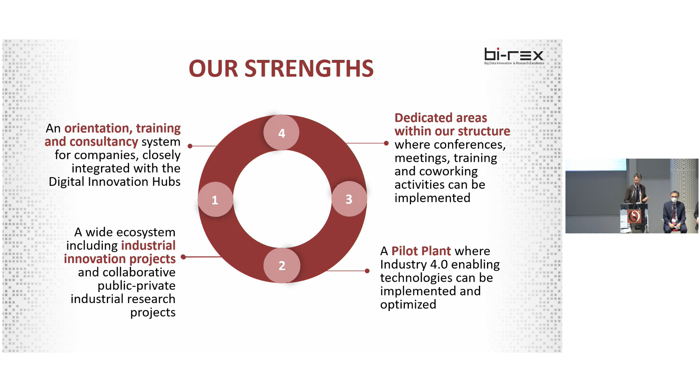I think this is the real core of the competence center. What is becoming crucial for companies, in particular small and medium enterprises, is to have the possibility to test technology before making investments. Our concept of pilot plant is a real smart factory where companies, professionals, and researchers work all together in a real production area.

We can produce over there, but without the limits of a production line. So you can make innovation, change parameters, you can play, let me say, with a production plant. This is a perfect test before investing in a production plant.

We also support the innovation projects we are co-financing there. And last but not least, this is also a crucial asset for all our training courses, to have a real hands-on area that combines, let me say, the academic and the company's training.

Just to give you a view, but again, my invitation to all of you in these 2 days is to visit us - our team will be happy to share the technology area. We also have laser technology, since here today, in these 2 days, we are going to be thinking about laser application and their impact on the manufacturing industry.

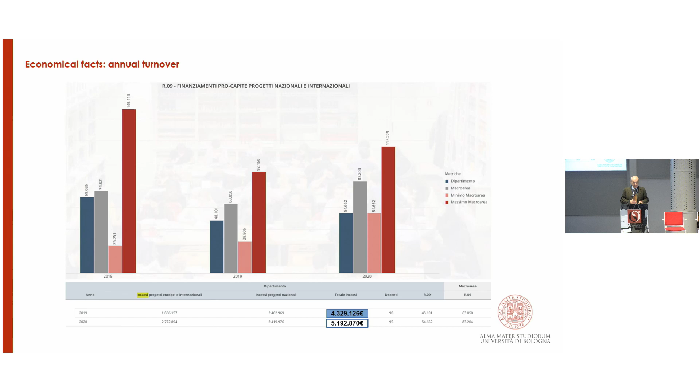Some economic facts: the activities sometimes mean also money used to increase activities and research. These are a couple of numbers regarding the work the department does with companies and competence centers. This is only the money, the return related to the relationship with companies, and a great part of this is used for equipment and positions for students after the bachelor's degree, in order to guide them on the path of research. Activities, didactical, yes.

The department is able to cover around 20,000 teaching hours per year, considering all locations, Bologna and Forlì, 4 laboratories in 2 different cities, and a great amount of other activities that make students aware of problems in the field. This includes competitions and learning by doing, meaning they're involved in collaboration with companies, internships, theses, and many other activities.

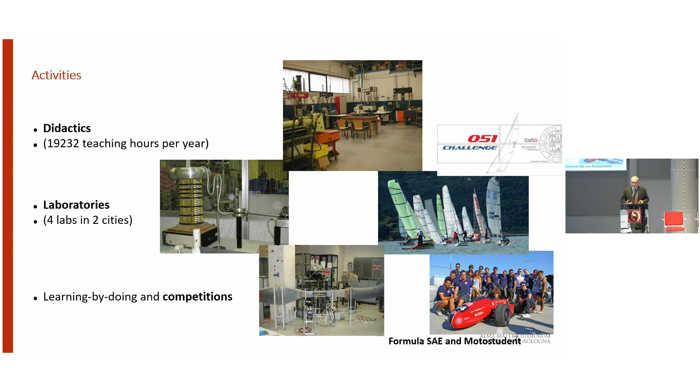This is what we are talking about. In particular, this course is dedicated to automotive in general, but in particular in Bologna it is focused on motorcycles.

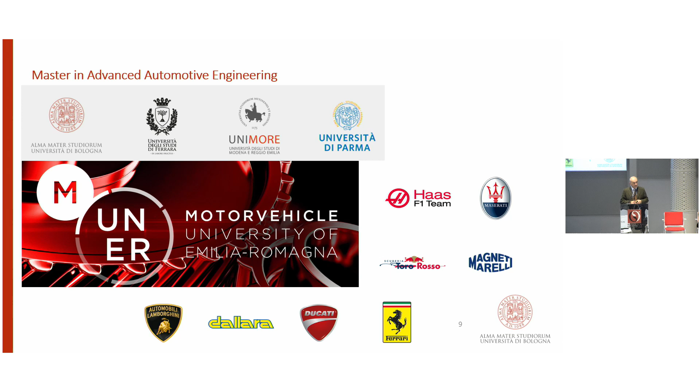Well, employment - I'm really very proud because we can see that our students start to work in a company very, very quickly after the bachelor, and they are very appreciated. I think that for our program, this means something really important and a great result.

What about research projects? At this moment, the department is holding around 500 projects at different levels, from European projects up to small local projects. This makes a great amount of activities, and most of this is dedicated to technology transfer to companies - this is one of the most important aspects. Our name is Department of Industrial Engineering.

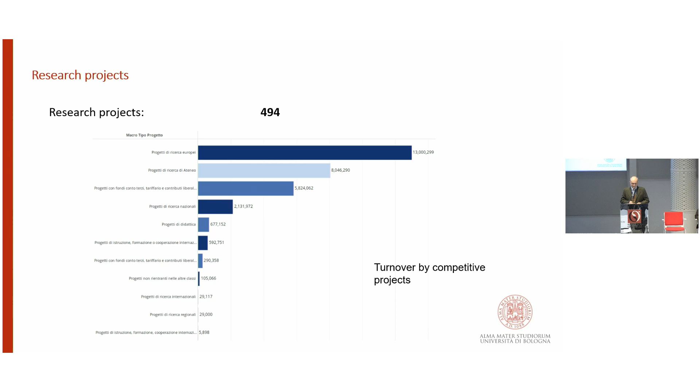Research fields are very different, various, and variable, from energy, management, machineries, manufacturing, of course, and engineering in general, design - this is all the capacity that the department is able to bring into the industrial field.

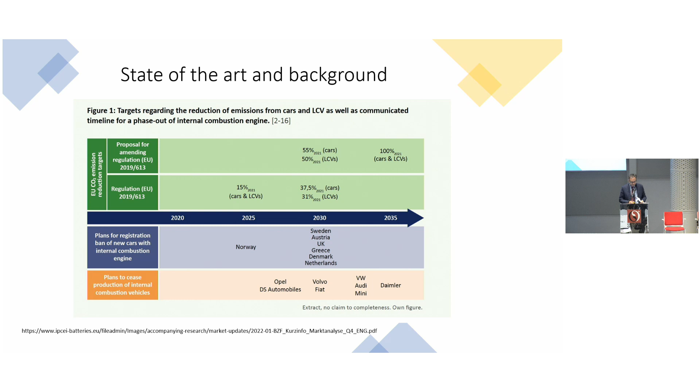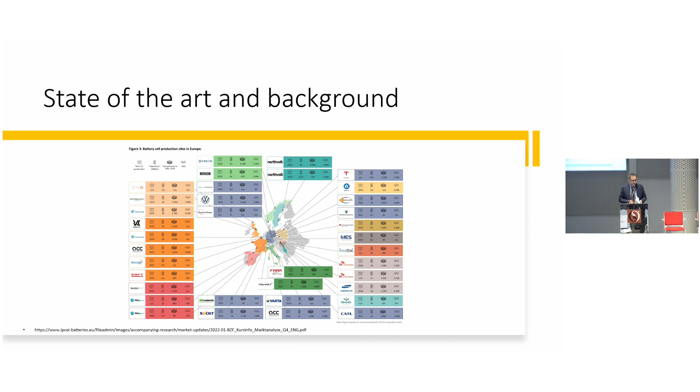As you probably know, there are several projects in Europe. Most of them are still projects, but all countries in Europe are organizing themselves for the production of this new electric power. This is a map of the gigafactories that will probably be built in the next future to satisfy the demand for electric power that we will need.

Why in Emilia-Romagna? Why did we start this seminar here? Because Emilia-Romagna is probably the only region in Italy where we have car manufacturers that are really transforming their production towards electric vehicles.

As you know, we have Lamborghini, Ferrari, Ducati, and Dallara, and probably I'm forgetting some other smaller companies. Here we are lucky because all these companies daily ask us for new information and new technologies, and this promotes the developing of knowledge, in particular the knowledge that we can develop in universities.

At the same time, we also have Muner, a consortium between all those automotive manufacturers. With this consortium and the university, as Professor Liverani said before, we have already created a master's degree program devoted to developing new knowledge in high performance motorcycles and cars.

The next question is probably: why lasers? We found a sentence that explains why laser is so important, because it is estimated that between 70 and 80% of all material processing in EV manufacturing can be done by laser. If you consider the increase we are having, you can imagine how important laser will be in the next future.

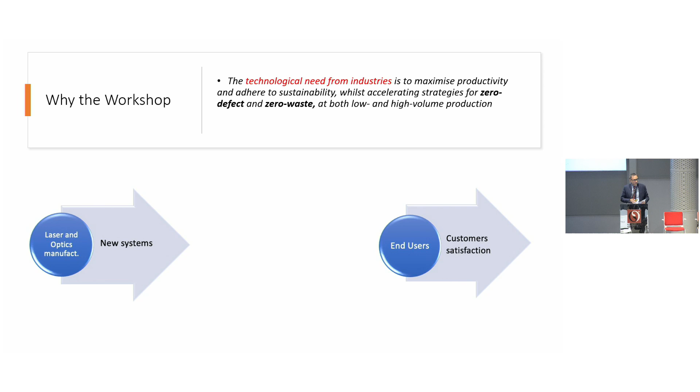So, in our opinion, why the workshop? Because we have laser and optics manufacturers that already have new solutions which can be used in companies, and end users at the same time are willing to use those new solutions for customer satisfaction.

In our opinion, we now have the necessity to create a link between this new hardware and end users. Universities and research centers can develop and optimize processes, and also facilitate the introduction of this new tool, because laser is sometimes seen as a new tool for companies. By teaching students through PhD programs, universities and research centers can help companies use these new tools, developed in recent years, in the right way.

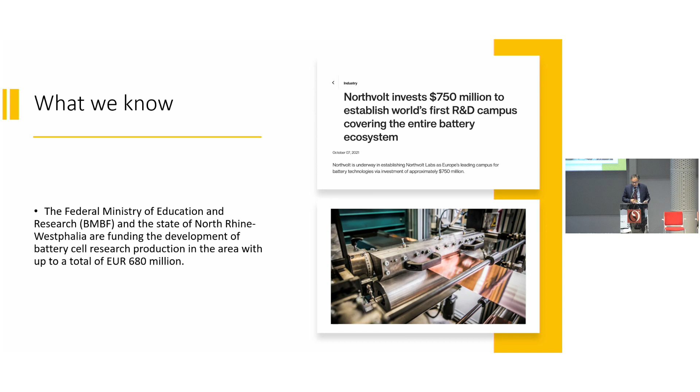So, what do we know from other countries? We know that all the European countries are doing a lot of investment in these sectors. This is information I easily found online about Northvolt - you can see how big this investment is in research activities. And this is also public information about what Germany is doing to promote and increase research activities and research development in these sectors. As you can see, the grant is huge, especially compared to Italy.

So we hope that in the near future, Italy and our regions can be on par with those European countries.

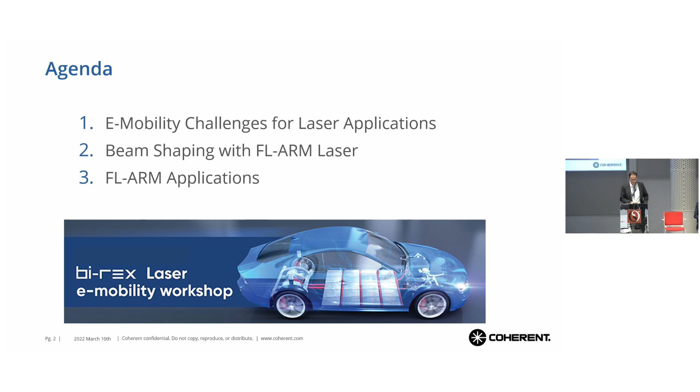So when we shift from the internal combustion engine powertrain to the e-mobility powertrain, or e-powertrain, we are losing a lot of components, but we are also gaining a lot of components. These components have a significant impact on the welding and joining methods we are seeing.

For instance, we are seeing parts coming into the e-powertrain that increase welding extremely - just think about battery modules, battery packs, or hairpin welding for stators. So there's suddenly a lot more welding that has to be done. Think about the welding length increasing in the e-powertrain - battery packs, battery trays, cooling plates - very long weld seams all of a sudden. And then think about the weld depth starting to change from extremely thin material to very thick material.

So here we also see quite a big variety coming for welding applications. Just think about battery cells with very fine, thin metals, versus inverters with deep copper welding. Here we see a much bigger variety all of a sudden for these joining methods to come.

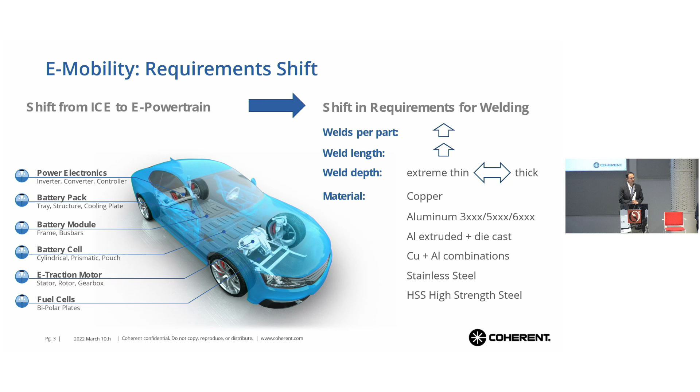And coming with these materials and these increases and modifications, there are a lot of other demands coming with these new components. For instance, all of a sudden we have to be gas tight, we have to pressurize these components after welding, and we have to have a very tight seam - we will not allow spatters on the parts. We have material combinations that are very challenging, not really meant for fast joining methods. We have components - think about battery cells - that are sensitive to heat, so you have to cope with these demands. So we have a variety of things that add to all these other demands we see.

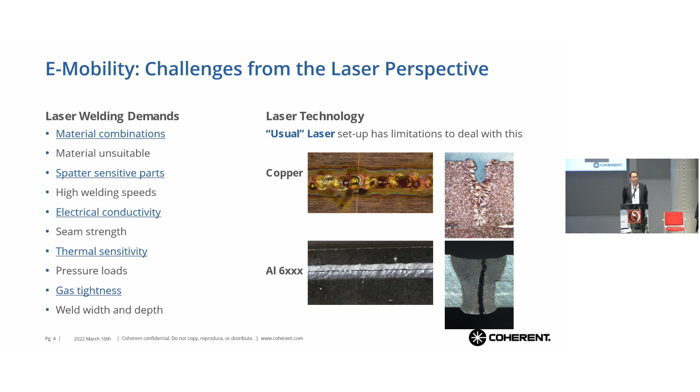So for the typical laser technology we are used to in the automotive business - typically welding all kinds of steel components and stuff like that - it's not really meant for coping with all these new technologies. So as you can see here on the slide, some of these things really cause trouble, and we have to do something to cope with these challenges.

There are some means we can use to meet these challenges. Of course, we can increase the laser power, which is a widely common thing we see. We increase the weld speed. We see a higher use of scanner optics and beam oscillation being used. There's a high variety of things you try in order to get better conditions, with different process strategies coming. We need to understand the welding process much better to really have a productive process, and we see various wavelengths coming to cope with these materials.

Today I want to talk about one of these measures, and that's the beam shaping with the ARM laser. The beam shaping here, we see a ring-core combination, and I will show a little bit what we can do with this ring-core combination to meet these challenges.

So, when we see the ring and the core working together, we all of a sudden have some effects when they are working together. These effects we can use for these challenging materials and challenging processes, and how this is working, I will give you a little bit of an overview.

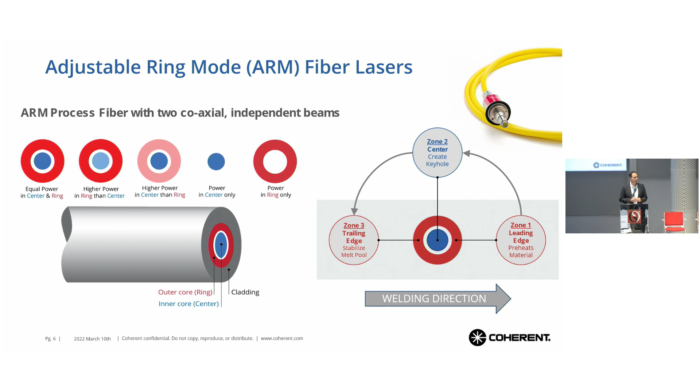First, for the principal understanding, the adjustable ring mode, or ARM laser, that we have in our laser technology comes with a coaxial fiber that delivers two beams, a ring beam and a center beam, coming through the same process fiber in principle. The special feature of the arm laser is that you can completely individually control the power of the core and the ring, or the center and the ring. The combination of the center and the ring is the theory we see here.

When we are welding onto the material with the spot, we see the leading edge, zone 1, shown here. Zone 1 is the leading edge that preheats the material when welding. The center forms the keyhole, zone number 2, which is typical keyhole welding. Zone number 3 keeps the keyhole open much longer and stabilizes the melt pool as it still heats up the welding seam.

So this is the theory to it, and what we can do with it I will show in the various applications.

Most important to understand is that we deliver a variety of different fibers with the arm laser. You can have this as a spliced version, a direct coupled version, and then different diameters. For instance, what's very new is what we call single mode arm. This is the first in the row with a single mode in the center, 25 micrometers, and 170 in the outer diameter of the ring. There's a huge variety.

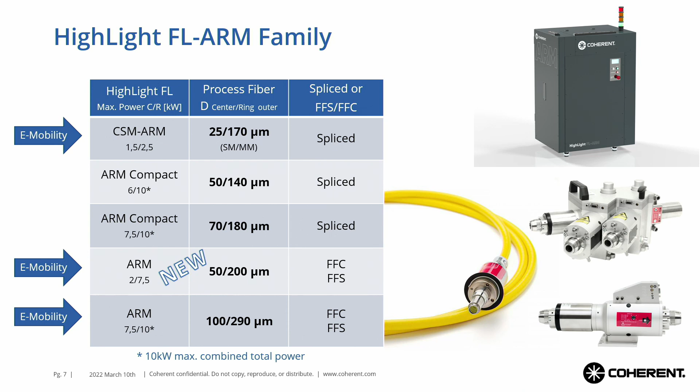We have a new variety, the 50/200, marked new, which we see now on the market with high demand in e-mobility applications. The advantage here is we have a very good combination with the 50/200, but we can combine this with a fiber-fiber coupler or a fiber-fiber switch, in comparison to the single mode arm which is a spliced version. Last but not least, the 100-290 is also seen very often in automotive and e-mobility applications, as this provides a bigger spot and also comes with a fiber coupler or fiber switch.

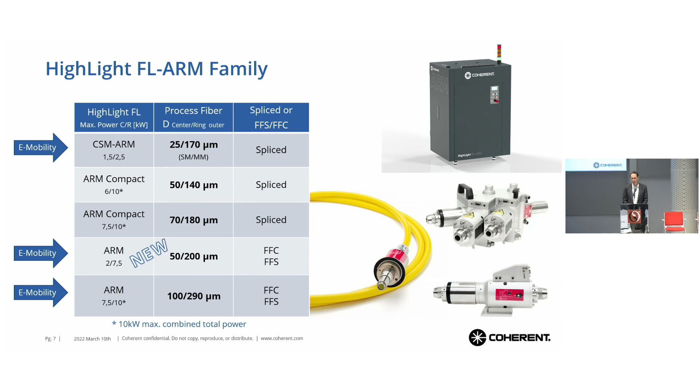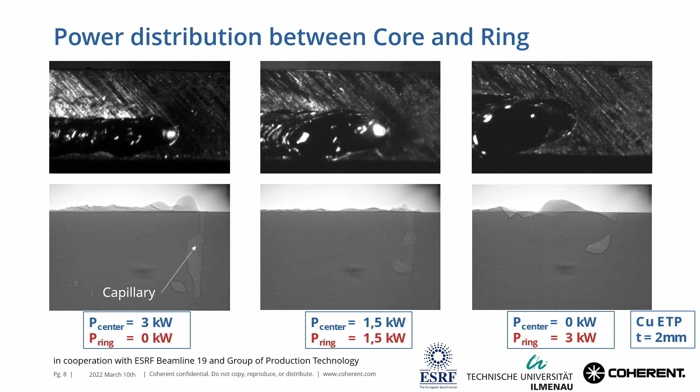This is something we have to figure out exactly for your application, and this is what we are doing in our apps labs to help you, together with our technology, bring together the right parameters to have the best results for you as a customer.

One of the features of the arm laser, which I mentioned earlier, is that we can completely independently control the core and the ring, or the center and the ring, from each other. This has some advantages, so we can use these effects in a certain way.

For instance, when welding copper, what we do is heat up the copper material, then ramp up the center. So when the copper material is heated up with the ring first, we increase the absorption for infrared laser, and then we can bring in the full power with the center and weld it.

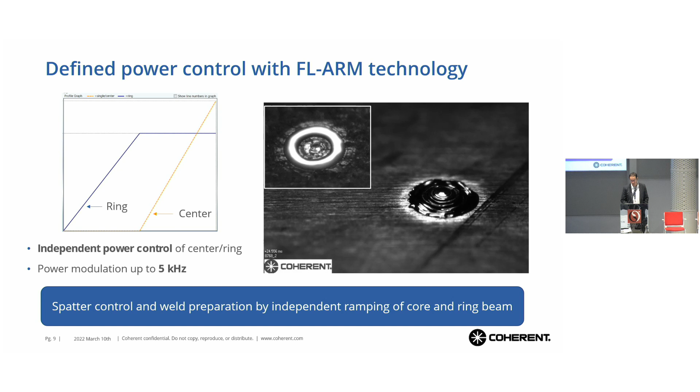Also, what we can do for the starting point of the weld seam - powering up the ring first and then powering the center - we can do the other way around when we stop the weld seam, and we avoid a pore or a crater at the end of the weld seam.

What's also a feature of the ring shape is that we can weld in all kinds of directions, unidirectional - it doesn't matter. The effect is always the same, even if we are doing different shapes or oscillating.

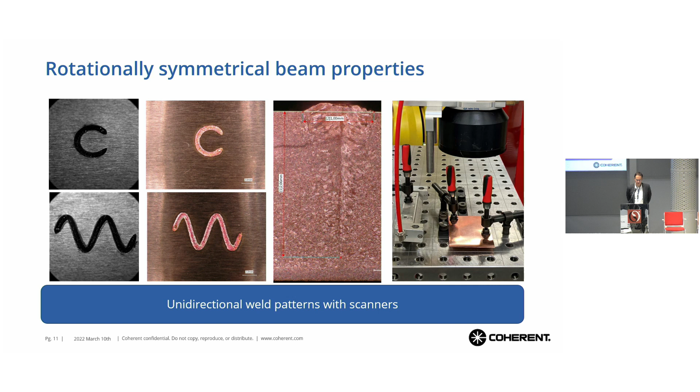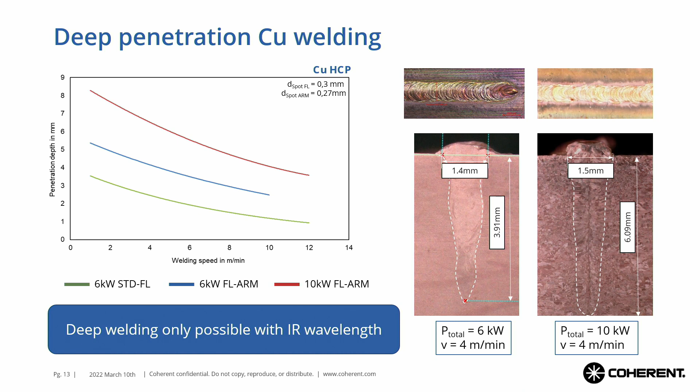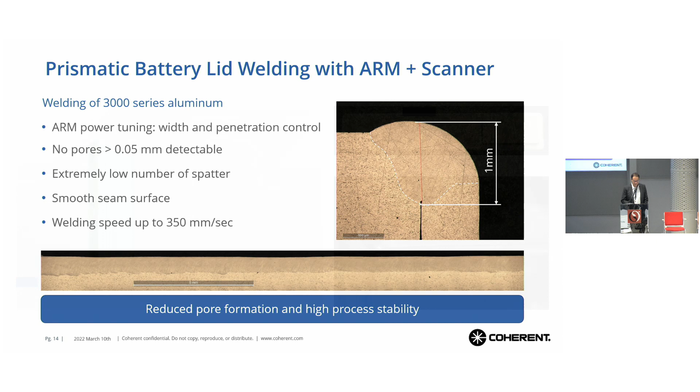Here we have some pictures. Sorry about that, start again.

Here we go. This is some of the welding that we do to the battery can. So you see a very controlled and very even welding that we have, even around the corners. So it's very important to have no spatters here and have a gas-tight welding.

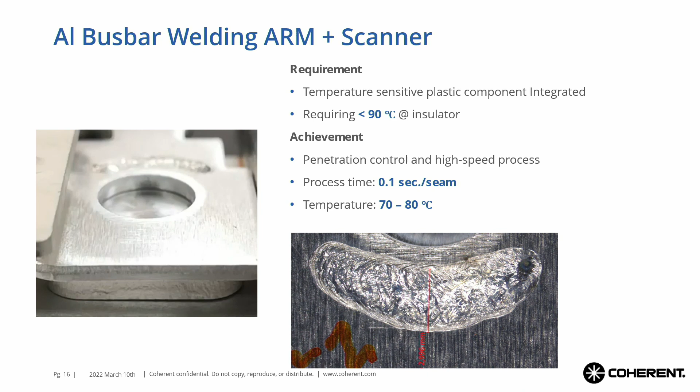Another example for aluminium welding is busbar welding for battery modules. The requirement is to weld very, very fast, because we don't want to harm the material inside and the isolators that we have there. So here the task was not to go over 90 degrees. With the fast welding, we reached about 70, 80 degrees in this example. You can see here the welding.

One more slide and then I stop.

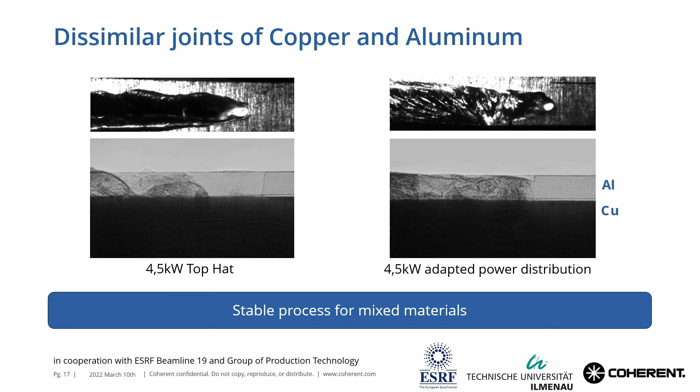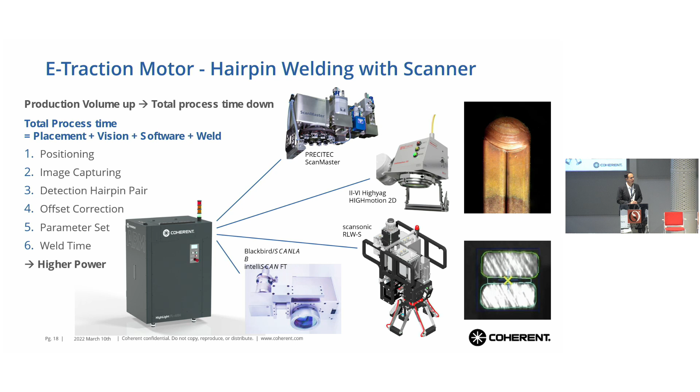Thank you, Thomas, very impressive. Thank you, impressive, congratulations for those results and for the presentation. Are there any questions? I cannot see questions from the... okay, please, Antonio.

Sorry, Antonio, just one minute. The microphone is coming.

It's very interesting, the concept to have a dual beam in the fiber. Did you take into account using other wavelengths, and even combining two wavelengths, one in the core and a different one, for example blue, in the cladding, the external cladding? Thank you. For the moment, we only have this near-infrared fiber laser. Other wavelengths are important, I understand this, but currently we don't offer them, and we are not experimenting with this hybrid version of different wavelengths in the core and the ring.

Thank you, Thomas. More questions? Time is over, we cannot have time for another question, sorry. But I'm sure I will come to visit your stand. Congratulations.

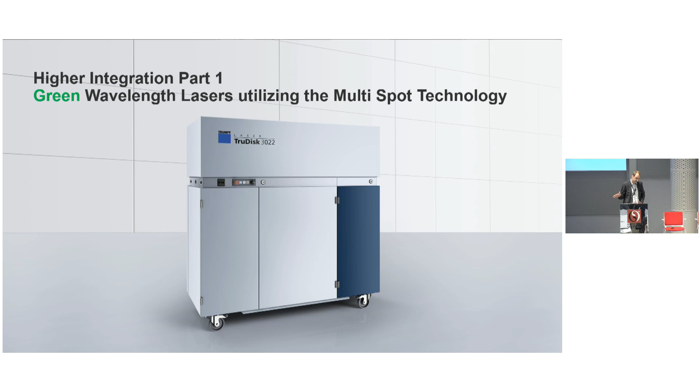Through the green lasers, the visible wavelengths, we have found that they work especially well with copper, increasing absorptivity. But once you leave the heat conduction weld mode, we have seen some gaps in between regarding performance and quality of the weld seams we're generating.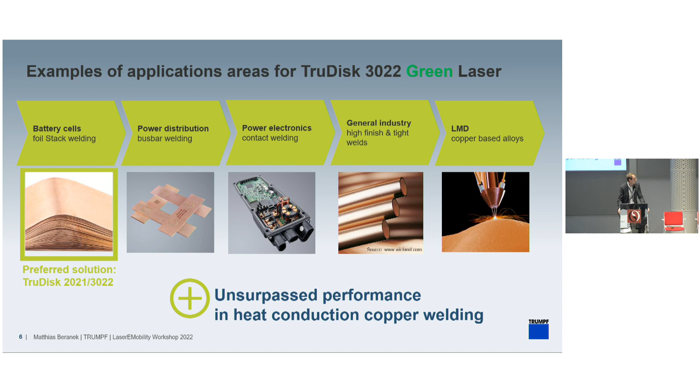Higher integration also means we will use the latest waveguides we have, talking about brightline weld, and scale it up even further. This is an application we get increasingly requested, where it's all about tightness, helium tightness in many cases. This is true for everything which houses power electronics, like inverters, loading sockets, and so on.

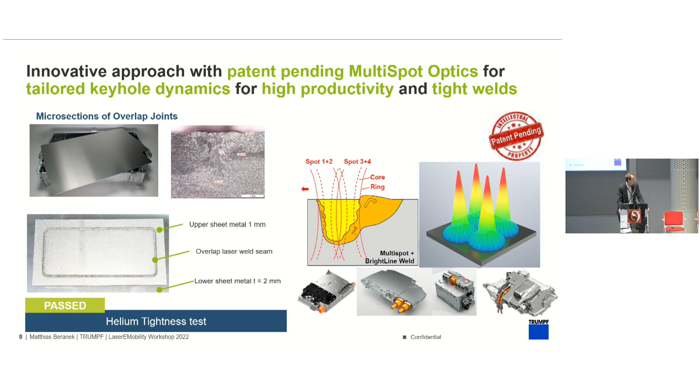What we did here is add a DOE, a diffractive optical element, to the brightline weld system. On the right side you can see the result: we would be using 4 spots instead of 1, which especially increases the width of the weld seams, greatly contributing to getting the tightness needed for high specifications. If we look at some high-speed videos of the process, I think the difference is directly visible.

On the left side, we've got the standard BrightLine Weld layout with a relative size of the melt pool. On the right side, you can see the effect of that multi-spot waveguide: you get a wider seam, or a wider melt pool in this case, which then leads to that tightness.

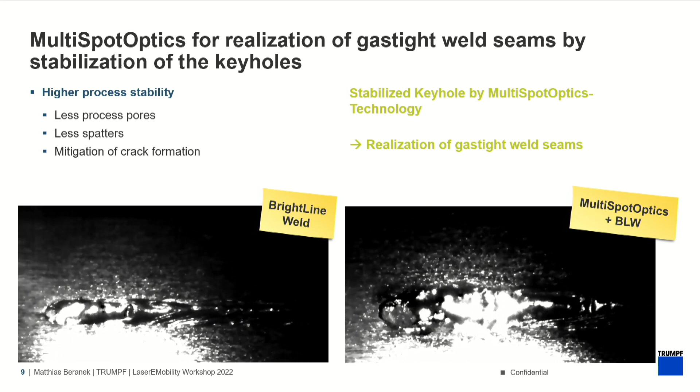A side effect of that is that we've seen also improvements for the welding of cast aluminum. I think many of you know this is not easy, even with the laser. With this multi-spot optics, as you can see, we have created seams with a high degree of cleanliness in terms of porosity formation, so very low porosity.

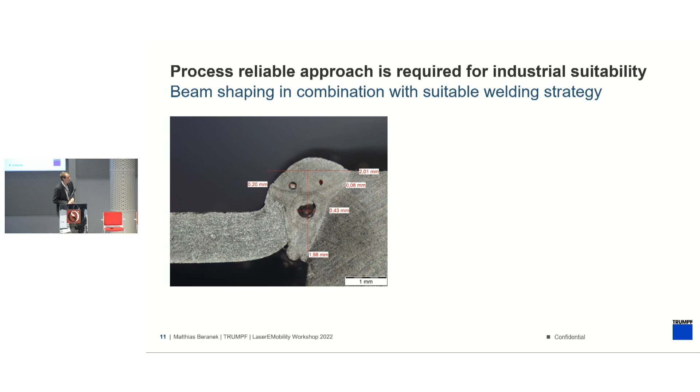The approach here is to have a multi-pass weld as well, not a single pass weld—it's repeated, which allows even improved outgassing of the pores. In the old world, the pores were practically laughing at you in some cases. With the multi-spot optics, we can see a great reduction of porosities, which is the main problem in cast aluminum welding. So it's quite a great result.

Then there will be improvements and even higher integration in the can cap welding. This is for prismatic cells, what's used today, let's say, welding with a relatively low speed.

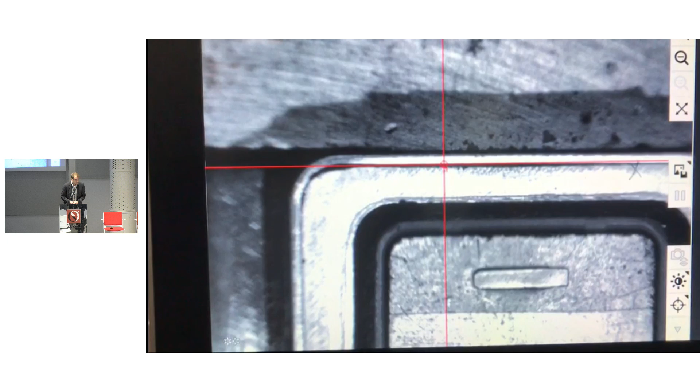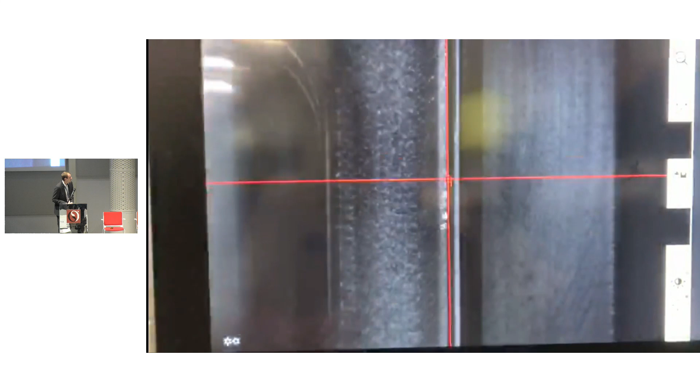And what we will do now is combine the sensor technology in order to exactly determine the weld joint. You can see that it's just a dry run without the laser on, which is quite essential in order to get to what you can see in the final video.

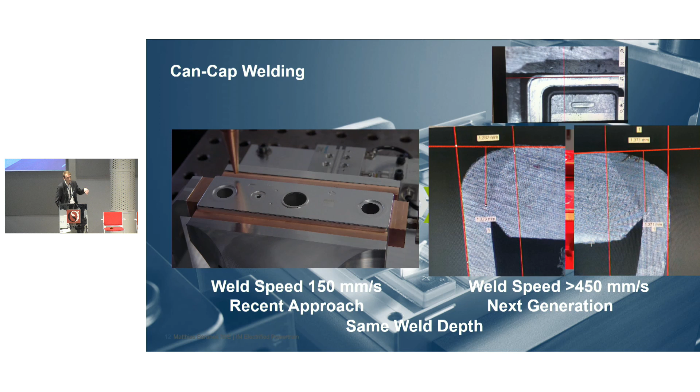Using again a bright line single spot process, but then be capable of getting much faster, so that's 3 times at least the productivity we have today. This is what's possible with the combination of weld joint detection and scanner welding. So that's the cross sections - welding depth here was 1.3 millimeter, and the uniformity of the weld seams all around the can is actually quite high.

And then I go to the higher integration part 3. This is the hairpin welding, which has certainly grown quite mature. The main application here is, of course, the contacting, the welding of the pins, regular pins, as well as the phase connectors of the E-drive.

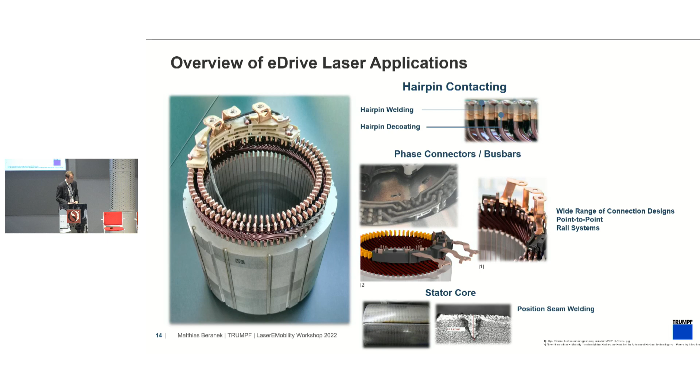We're doing this for 5 to 6 years now, practically every day. There's an installed base of more than 350 high-power lasers from Trumpf for both the welding and the ablation, which is the preparation process happening before the contacting. And for that, it has been a great time.

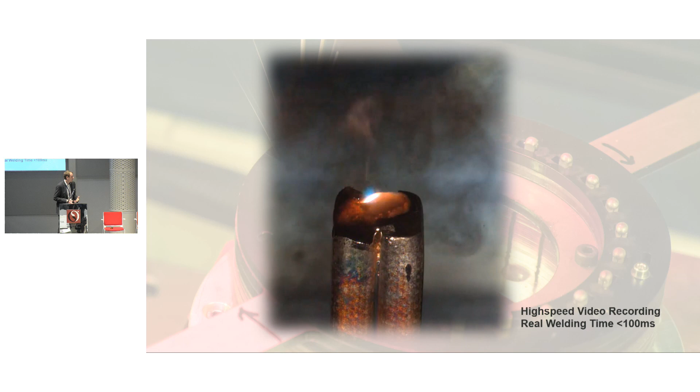What you can see here, just in case you haven't ever seen a hairpin weld, that's a high-speed video of how it's carried out. So usually you will use the scanner, which creates a certain shape, a wobbling movement on top of the pins, which then will create the melt pool. It's important to understand for everything I will say afterwards. By the way, welding times at the moment are around 100 milliseconds for the typical cross sections.

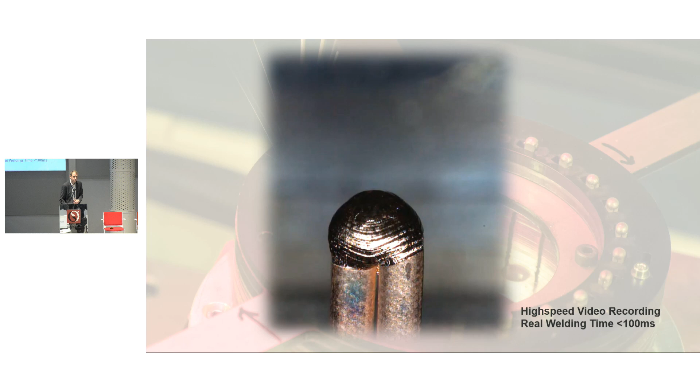So this uses high power infrared lasers, most of the cases with the BrightLine system. The reason for that being 2 things in the first place, one of which is spatter formation, which is more relating to the manufacturing side of things, talking about keeping the machines clean, and also do no damage to the windings of the motors.

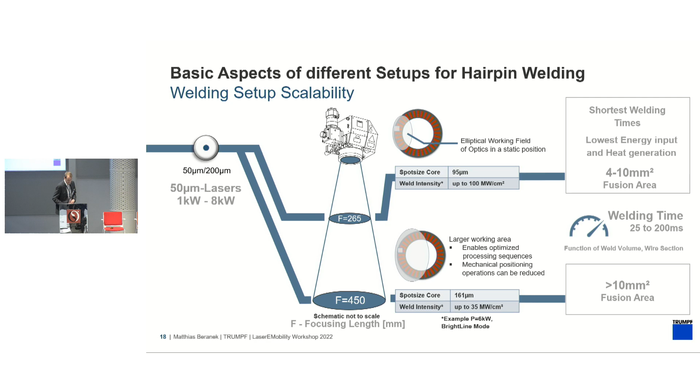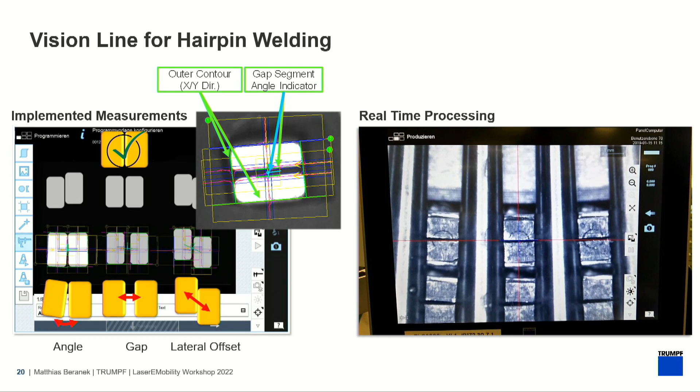So born with the hairpin application was that you will use a distinctive process in combination with a sensor technology. In that case, we have to cover dislocations of the pins which still occur in a fixture, even proper fixtures, and try to level it out or have cancellation strategies, easiest case. So we will measure the outer contours of each and any pin, even before the weld is starting, in order to deal with the problems which might occur.

In the production solution, we will of course not measure pin by pin, but go to group measurement strategies, this is how we call it, in order to bring down the measuring times as they will add up to the welding times.

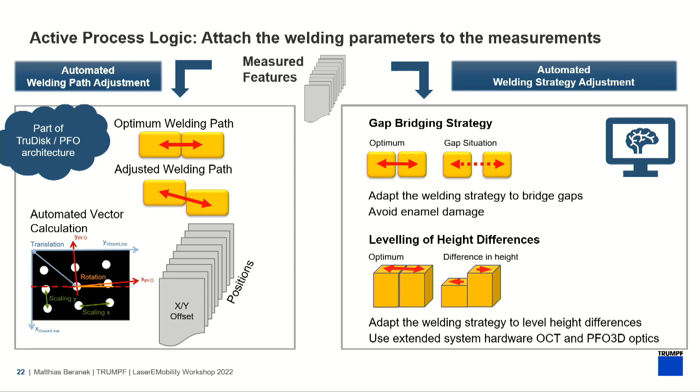So it contributes to increasing the robustness of the welding process itself. Another thing is that the sensor systems, of course, have their weaknesses. This is something which today happens in the ppm range of failures.

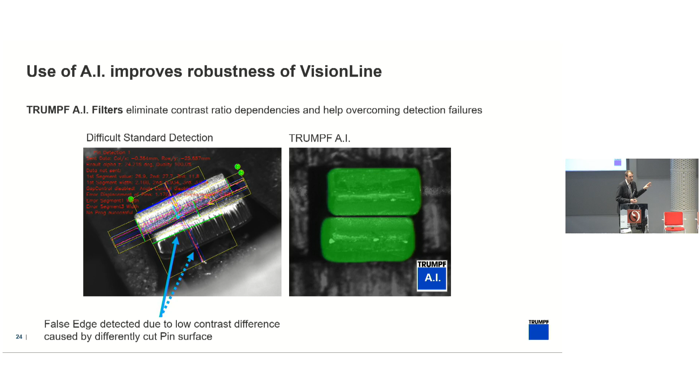Imagining the mass of welds we have to do, especially looking at larger volumes of e-drives, there will be false measurements, because this is picture acquisition—grayscale evaluation of the pictures. On the left side it shows what could happen in some deviation cases, a false measurement. What we are transitioning to is replacing that grayscale evaluation with artificial intelligence, pattern recognition, which is meant to bring that ppm range of failures down to zero.

It just works great. It gets you independent of contrast conditions on the parts and whatnot. So this is the next step in technology, which will be just great.

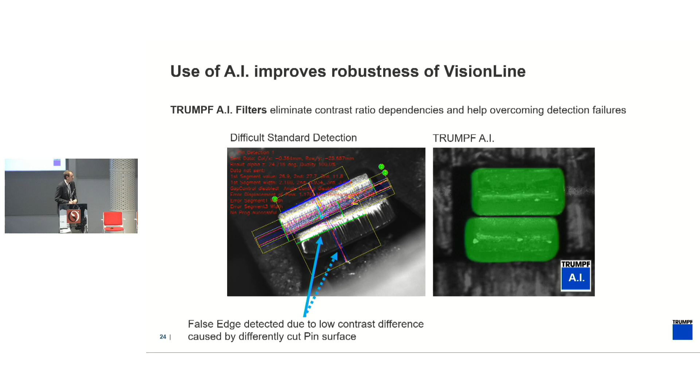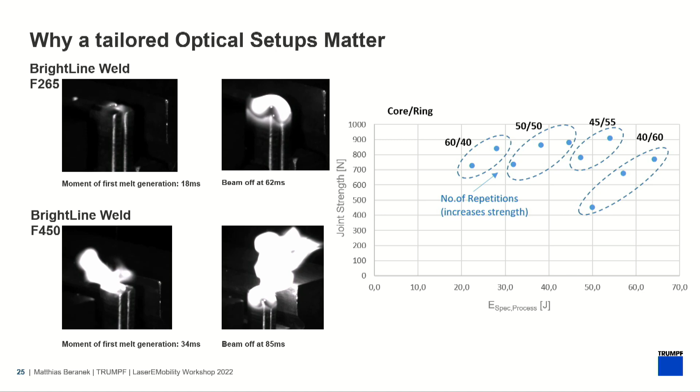I'm almost done. At the moment there's a discrepancy between what we want for a perfect welding process—like using a very small spot—and what the machine concept might want, a large working field. To bring that together, we've created the possibility to unite the two into a multi-optic concept, which will in addition reduce the cycle time quite a lot.

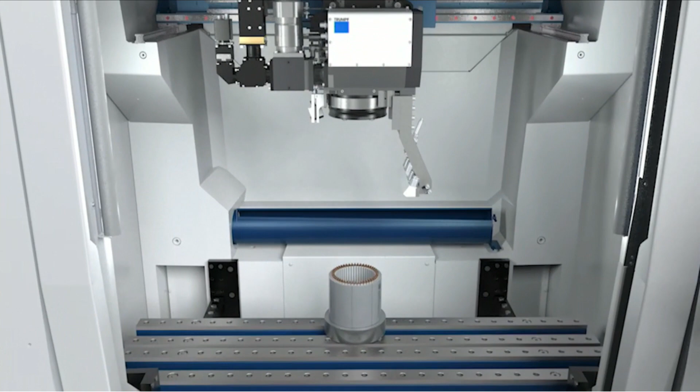So if you look at the video, this is how it's working today. The measurement is done up front, like I told you, and then the welding is carried out, shown here in red. And we even have to split it two times in the stator. So this is how it's working today.

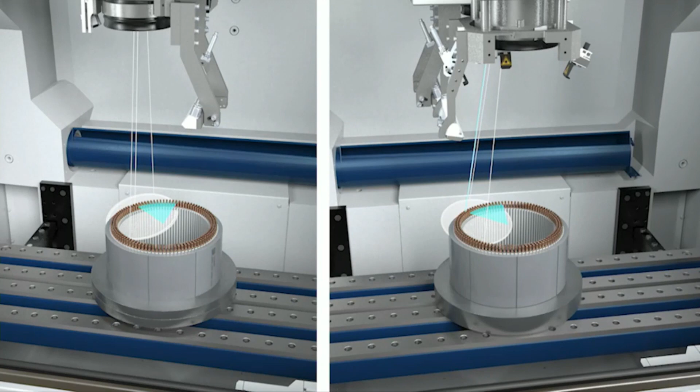If we now go to the dual PFO concept, we'll be capable of using the measurement values of one optic for the other one. This means a deeper and higher integration of the system, and we can cut down the overall cycle time quite a bit. It's especially impressive and interesting for large stators, which are quite standard.

If you pay attention on the left side, there's always some mechanical movement in order to get the next hairpins into the working field. On the right side you'll see more or less just one mechanical movement, and then the rest is done by the optics and measurement algorithms. Now we're finished on the right side with the dual optics, while the other one is still working.

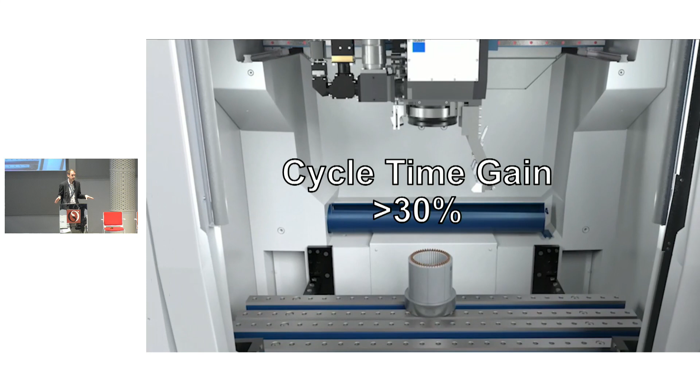The gain here, in that case, was around 30%, which is massive, given the fact that until today we were always working on optimizing the welding times themselves. Now this is just something which is coming out of the system, already giving a very high benefit in that case.

So I want to leave you with that. I'm even two minutes early, so there can be a lot of questions. Thank you very much.

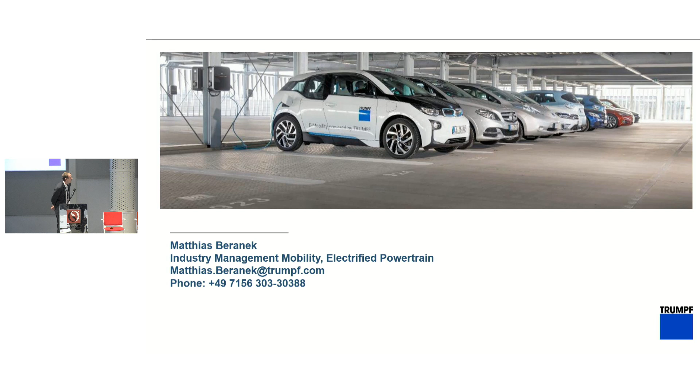So, for being on time, thank you very much, and congratulations on these new research results, very impressive. Are there any questions from the audience? I cannot see questions from the people connected on the internet, so please, Gökhan.

Thank you very much, Matthias. It's actually good to see you after 2 years, right? So, yeah.

Congratulations on everything we've seen so far. You showed the importance of integration, not only the laser, but I have a laser question, being a laser guy. You showed a nice graph with green lasers, and it's nice to see commercial green lasers, near infrared, green, 3 kilowatts, BrightLine, single. But the green laser is essentially an infrared laser that is converted. So the question is, if we increase the power of the infrared laser, do you have comparable results from that point of view? A high power infrared laser against a high power green laser, how do they compare?

I think they are quite hard to compare in the first place. You have to have the use case in very demanding applications for infrared at all. And it's quite right that if you had the 3 kilowatt green, this would mean an original 6 kilowatt infrared. If I compare that, we usually have totally different applications where there is not a 6 kilowatt green laser at the moment to compare to a 6 kilowatt infrared. So it's a little bit tricky, but I would say the use cases differentiate really where there is a very high welding depth, for example.

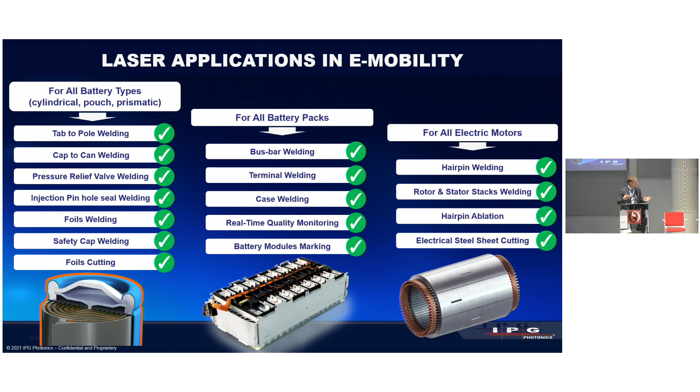So when we receive a request from the customer, we start understanding how to approach the problem. The customer comes with a problem, but the laser is not a universal tool. There is not only one laser for doing everything. So we start understanding what is the best laser for that specific application, for that specific problem.

So the lasers differ in terms of wavelength, for example, and we have seen in the previous presentation that wavelength is not only infrared, other wavelengths are interesting for these applications. But also lasers have different characteristics in the time domain.

So we can go from CW, where simply you switch on the laser, fire the power, switch off, and the laser stops. Or you can move to QCW lasers with millisecond pulses, with high peak power and low average power, or down to nanoseconds, few nanoseconds, picoseconds, or femtoseconds, and the results of your laser-material interaction are completely different.

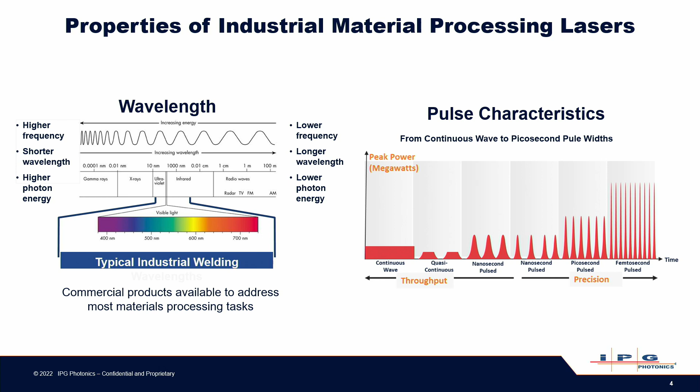So this becomes even more important if we work with high reflective materials, difficult materials like copper or aluminum, which are the most popular in the e-mobility world.

If we consider copper, for example, we start understanding whether it's better to work with visible radiation or infrared radiation, because the two solutions are different and give different results. If we consider the initial absorption from the material, it seems visible is better because the absorption is definitely higher in the visible range than in the infrared.

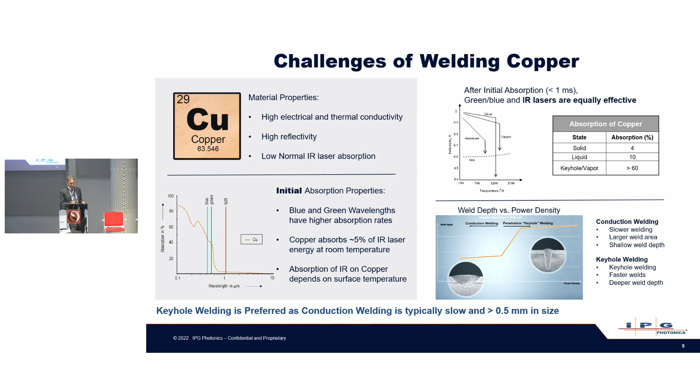But if we consider what's happening on the material as soon as we start the laser, the situation changes immediately. In less than 1 millisecond, the absorption changes dramatically. As soon as you move from room temperature to heated up material, or to melted material, or after the creation of the keyhole, the absorption increases dramatically with significant benefits. So again, we have to decide what is the best laser for the application.

IPG is producing a lot of lasers. Everyone knows IPG. IPG is the world leader in fiber lasers, the first to introduce fiber lasers into the industrial market. And we currently have, I think, the best laser product portfolio, with lasers scaling up to 120 kilowatt CW. Actually, we also got an order for 125 kilowatt CW, but down to short pulses, picoseconds, femtoseconds, UV to mid-infrared, so a lot of opportunities.

But laser alone is not enough, so we introduced different possibilities for different optics, so you can get very small spots, single small spots, or multi-mode or different beams. We also introduced optics, heads for the process, scanning heads, wobble heads, because the laser alone is not enough. But at the end, what is important for the end customer is not how the laser works or how it welds its parts - what's important is how well the parts are welded. So we introduced the monitoring option too, because at the end it's important to have reliable production, stable production, high quality production.

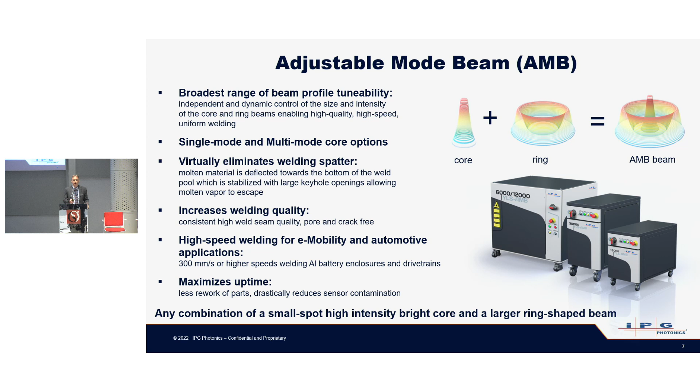Real single mode means 10, 15 micron fiber, and we can have, in principle, any power. We are delivering single mode lasers up to 10 kilowatt, but in this case 2 kilowatt is the perfect dimension. In the ring, we can have almost any power, but also any fiber dimension, because IPG is very vertically integrated - we design and produce our own fibers, which allows us to design the solution that we think is better for the customer's needs.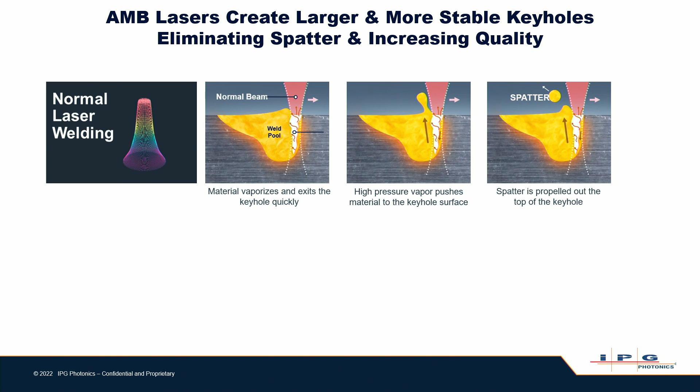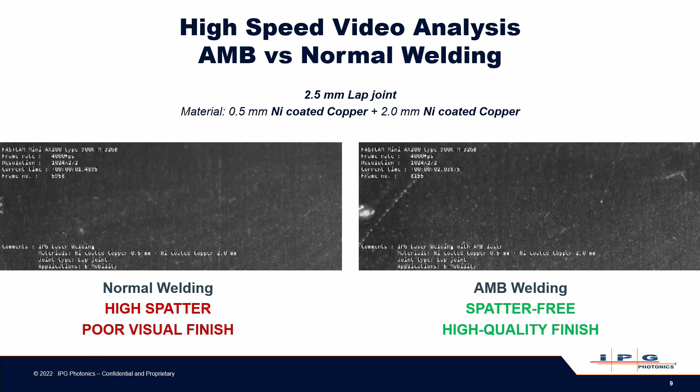And the benefits of the AMB we have already seen - better quality, better stability of the process. We also tried to give an idea why the AMB brings better results, mainly spatter-free and better quality. This has been well explained already, so I can save some time for my presentation. At the end, the ring added to the beam allows better stability of the keyhole, better dynamics of the gas pressure inside the keyhole and of the weld pool, generating a very stable result. You see here the comparison in the same application with the standard beam and with the AMB.

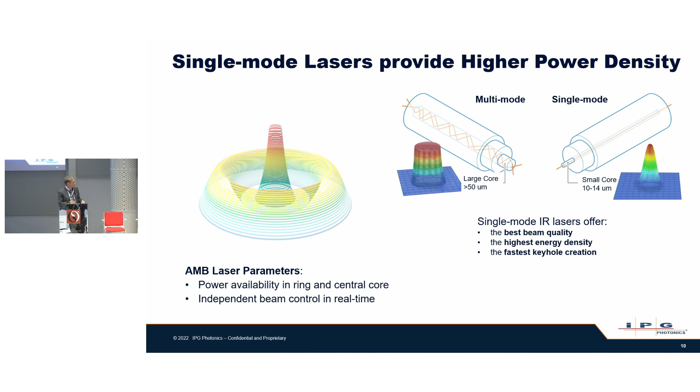So as said, we have two completely independent lasers, with a single mode in the center, because the single mode is important for having high power density, so deep penetration, very high quality deep welding, and any combination of the core and ring.

So if we compare this solution with the visible, the green and the blue, we can agree that there is better absorption at the beginning, but that's just for the first milliseconds of operation, hundreds of microseconds actually. At the end, infrared radiation is well-known, well-developed, available in any power and optics combination, definitely more convenient, cheaper, more reliable.

So at the end, from the point of view of the end customer, what's important is the production. Infrared radiation is normally the best. We're not saying that visible has no advantages, but not here.

If customers come asking for a green laser, we can sell a green laser. But if a customer comes with a problem, we prefer to deliver a solution.

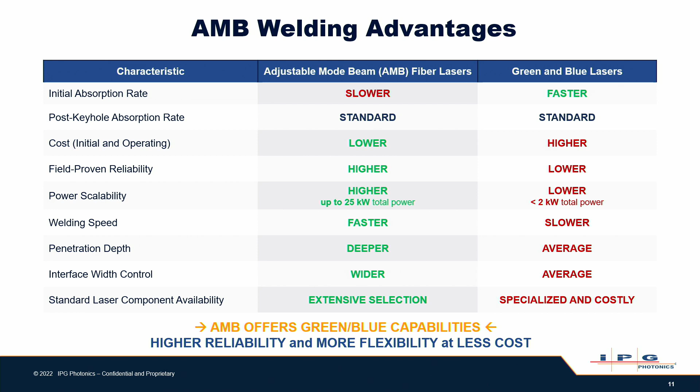Another important aspect is monitoring the production. Again, it's not important to weld, it's important to have good welds. IPG has been first in introducing direct measurement of what's happening on the workpiece. We are not measuring the radiation coming from the workpiece, not trying to understand what's happening by analyzing reflected or diffused light. We are directly measuring what's happening there.

And there means before the weld, after the weld, but also during the weld. So we are measuring for each single weld the penetration depth, and this gives a lot of information. It also gives the customer confidence in the quality of that specific single weld.

If you consider a battery with hundreds of welds, it's really important to have all of them well done. If something goes wrong, you know which specific weld was wrong, and you also know why it went wrong. Even more important, by analyzing the statistics of your welds, you can understand if your process is somehow deviating, and then adjust it to bring it back to a stable process.

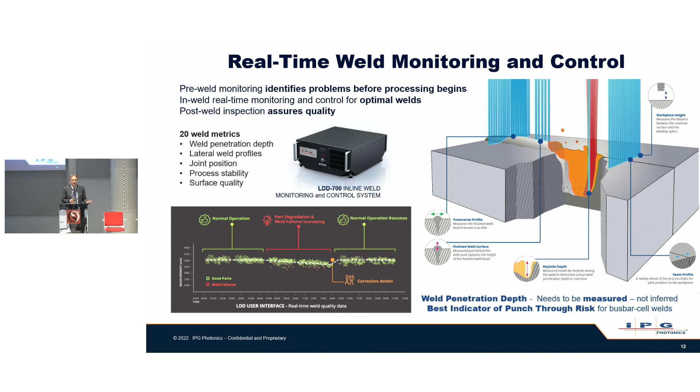But there is not only welding. We also have foil cutting, which is extremely interesting—still not so popular in Europe, but becoming more so because Europe wants independence from Asia for battery production. Consider that last year, only for this application, we delivered to China more than 4,600 lasers. So, cutting of the foils—some examples, some results—the cathode, the anode.

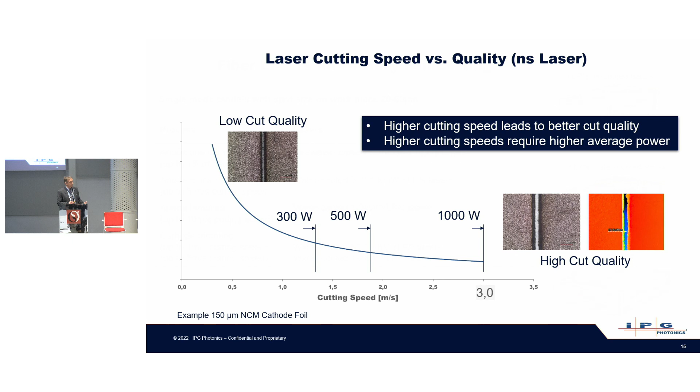We've seen that the faster you go, the better your result. So we developed new lasers for this application, because the existing ones weren't enough for the productivity and quality required by the market. We released new modules up to 500 watts nanosecond, air-cooled, because for some applications water cooling is never accepted.

So we also had to develop the air-cooled version, as well as nanosecond lasers up to 1 kilowatt, 2 kilowatts—something that didn't exist before but was necessary for this application, so we developed the solution. For low-speed cutting, we also use picosecond lasers up to 200 watts, because at low speed this also gives good results. So for any application, we can find the right laser.

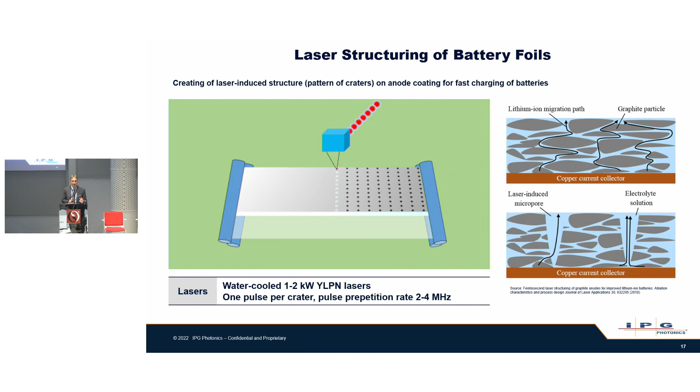There's also something new coming: laser structuring of battery foils, where we create craters on the surface to make charging and discharging of the battery faster and more efficient. Here we use a high-power nanosecond laser with a repetition rate up to 2 or 4 megahertz. Each pulse creates a crater, and you see the result on the material.

As said, we provide customers with solutions, not only lasers, not only hardware. So we developed this integrated laser welding system that puts together all the parts from IPG. You can use any laser from IPG, any optics—scanning, wobbling—together with our control, our software, our complete control of the process.

This is mainly used for welding batteries, bus bars, but also hairpins. With this setup, we can weld a stator from a single position—a stator up to 230 millimeters in diameter can be welded from one head position without repositioning. With the new lenses, a 500 millimeter lens, we can weld from the same position a stator up to 250 millimeters.

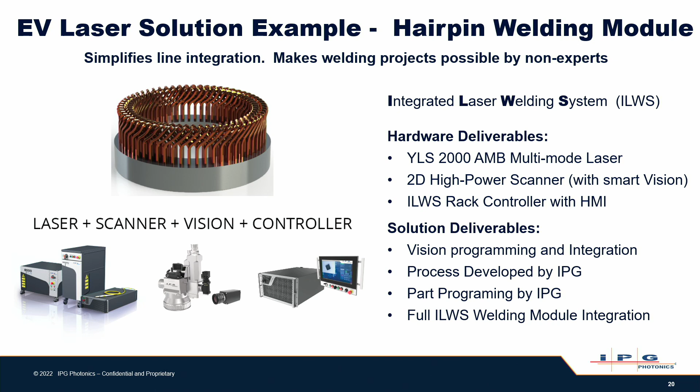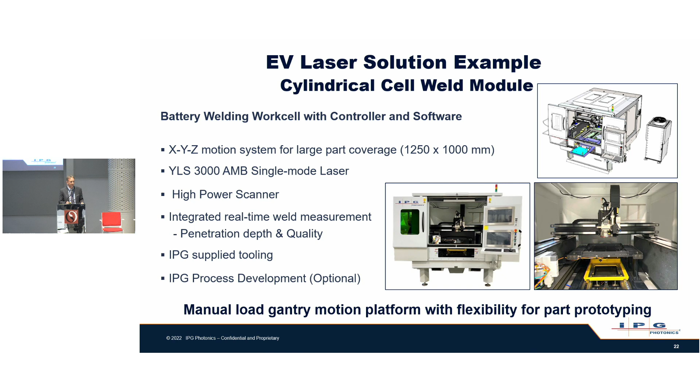So we have both solutions. This is not the preferred one, but according to us, it's only because it's not understood yet completely.

But IPG, especially in the US, introduced also complete production lines. So we can support the customer with a complete line. Here, there is the video of the line. What's interesting is that around the 50 seconds mark, you see the LDD, how it works.

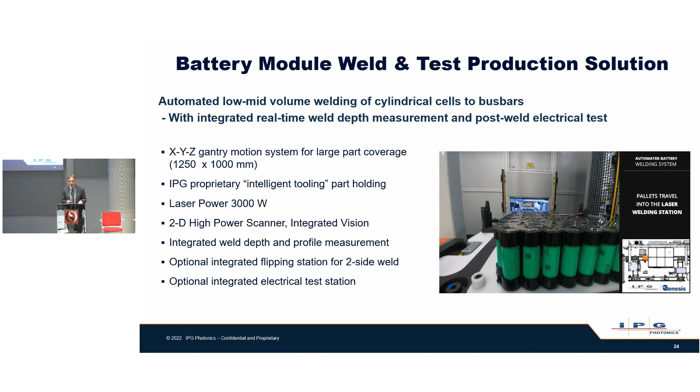So for each weld, the LDD is measuring the Z position, if it's correct or not, and checks the welds that are performed, and gives the green light if it's correctly done, or the red light if it's not properly done.

I don't know if we can make it faster. But let's arrive to see at least the LDD working. Yes, I'm finishing.

Okay, you see here, for every weld, after the LDD makes the measurement, it gives you the feedback after each single weld.

So in summary, IPG has a unique portfolio of lasers. IPG has 26 application labs all around the world. Here in Italy, I think that our lab is the most and best equipped laser lab in the country. But we have labs everywhere, and 2, 3 are coming in Poland and other countries.

So we think that IPG is changing the paradigm of the laser. The laser, everyone knows, was born as a solution looking for a problem. Now we are saying the laser is the solution for your problem, but it is important to have a partner that helps you in understanding what is the right laser.